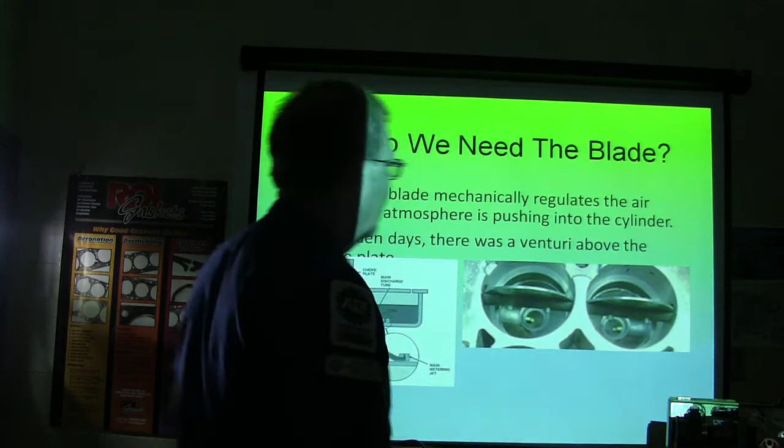The throttle blade mechanically regulates the air volume the atmosphere is pushing into the cylinder. In the old days, there was a venturi above the throttle plate. The venturi is right here.

Have you ever seen me take a hose, like you put a hose in a bucket and stick that hose out here and blow air past it, and it starts misting that water out? That's the venturi effect. That's what that is, and that's what this does.

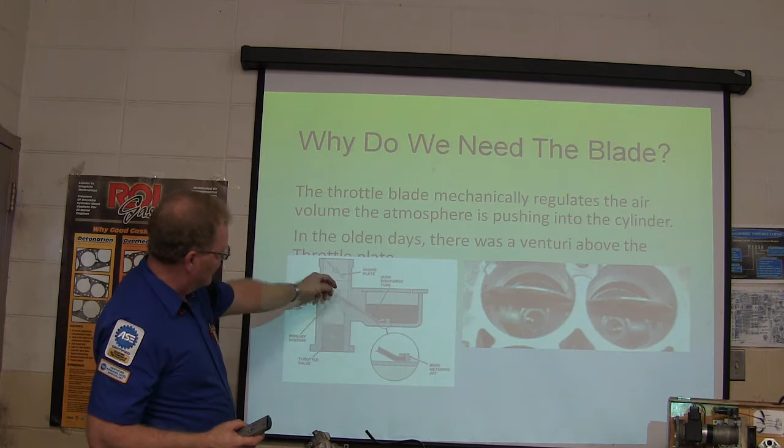Stop whistling. All right, so right here you've got this jet, and it's drawing this fuel up here, and it's turning it, atomizing it, and putting it down here.

Now, in those old days, whenever this was cold, you'd have your choke plate that would close so that you would have more fuel there. But you would also have a lot of this fuel that is turning into mist that was trying to condense against here, and it would cause problems.

So instead of having that happen, since they wanted it to stay mist as long as it would, you can put a screen under there if you want to and all that.

They basically wanted to heat this up. Ford Escorts had a grid under them, some of them, that would get really hot. You got your early fuel evaporation system on your GM.

On some of the old 390s, like on some of the trucks you've seen, it would basically have heater hoses going through a thing underneath the carburetor that was supposed to get it really hot really fast.

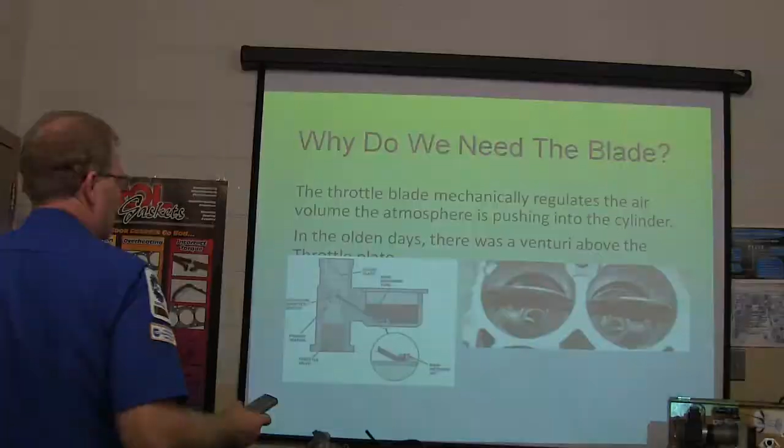But anyway, there's your throttle plate looking down through there. Now, the choke plate richens the mixture by cutting off some of the air. A rich mixture is required for cold engine starts and to keep a cold engine running. Do we need this on a fuel injected engine?

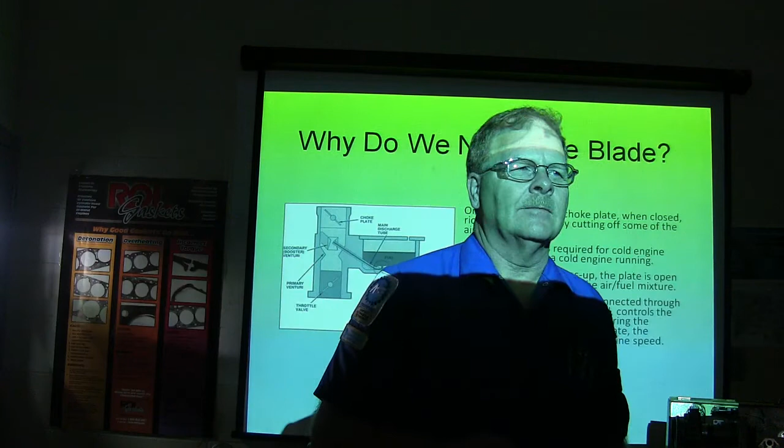Not a choke, but do we need a richer mixture when it's cold? Yeah, we do. The engine underneath all that fuel injection still needs the same thing it always needed. So when the engine warms up, the plate's open and no longer influences the air-fuel mixture. Typically this choke plate is going to be completely open within about 90 seconds on one that's got a heated choke.

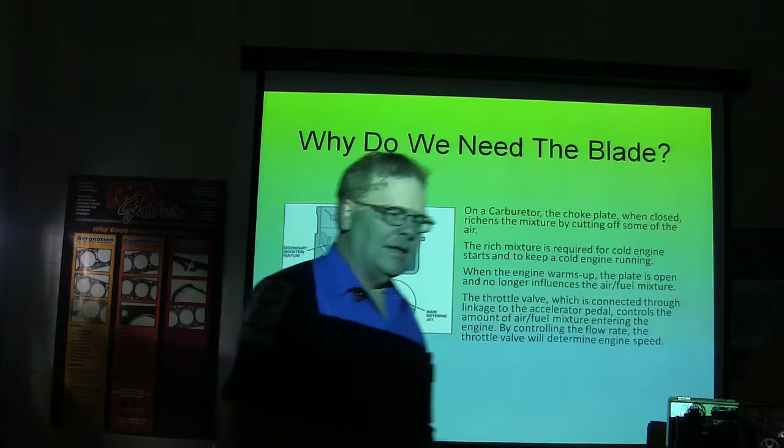When the throttle valve is connected to the linkage accelerator pedal, it controls the amount of air and fuel. There's an accelerator pump in here that's not pictured. It's basically a little diaphragm, or it'll have a little cup that looks like a wheel cylinder. When you mash it, it squirts fuel out on those venturis to overcome the gravity of fuel having to come up out of the venturis. It's not going to happen instantaneously, so you've got to have an accelerator pump. When there's no air flowing through except what you're spinning, the accelerator pump wets the manifold so that it can start up.

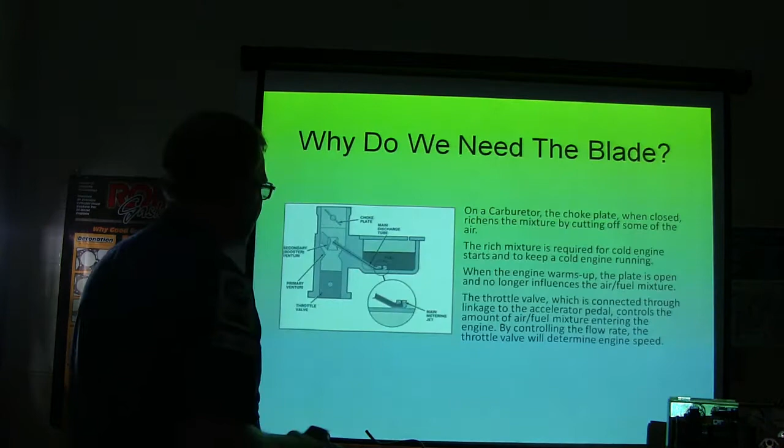The additional fuel delivered when the throttle's open unites with the oxygen and it burns. Now what is it that expands in there? What is it that expands?

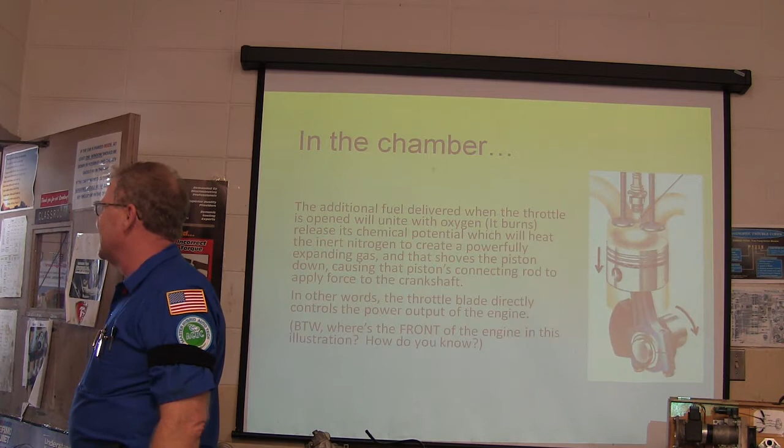Hey, you dissed me, man, how come you didn't show me? Well, I had a few things go on this morning, and I ended up having to ride with my buddy. But I've been meaning to get over here. I've been busting ass ever since I had a test at 8 o'clock this morning. I got some stuff I got to pay and all this jibber jabber. But I'm probably gonna be there Monday. I'll be looking for you Monday morning, don't be late. No problem.

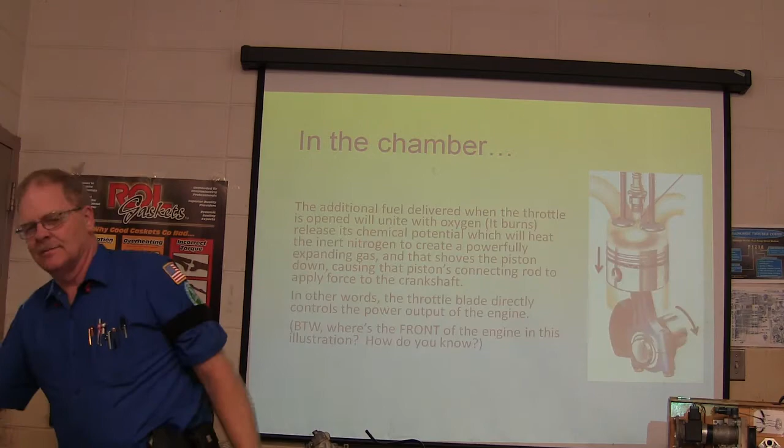So what is it that expands and pushes the piston down? Combustion gases. Well, what is it? Think about this. What's in the air that's going in there that's mixing with the gas? And what else? Nitrogen, hydrocarbons, nitrogen. Most of it is nitrogen, isn't it? 78%. So what happens is the oxygen, there's a little bit of oxygen in this hydrocarbon, and the nitrogen expands.

Yeah, the nitrogen expands, and expanding nitrogen is what pushes the piston down. The nitrogen's inert, but it's actually what you'd call the working fluid, it's actually what's doing the work. The explosion happens because of the other gases, but the nitrogen's what's expanding. You don't usually hear that, right? Because most of what's in there is nitrogen. The explosion is probably the initial kick, but then afterwards it pushes the rest. The nitrogen gets really hot, and when it gets really hot, it's pushing the piston on down. But the oxygen is what accelerates the combustion and unites with the carbon.

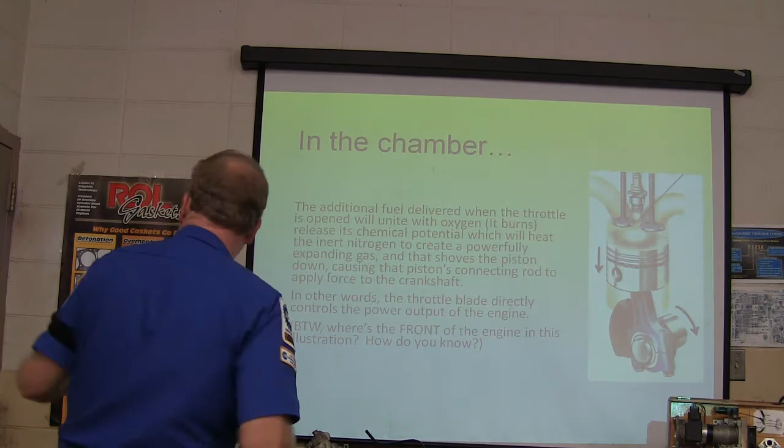The throttle blade directly controls the power output of the engine. So where is the front of the engine in this illustration right here?

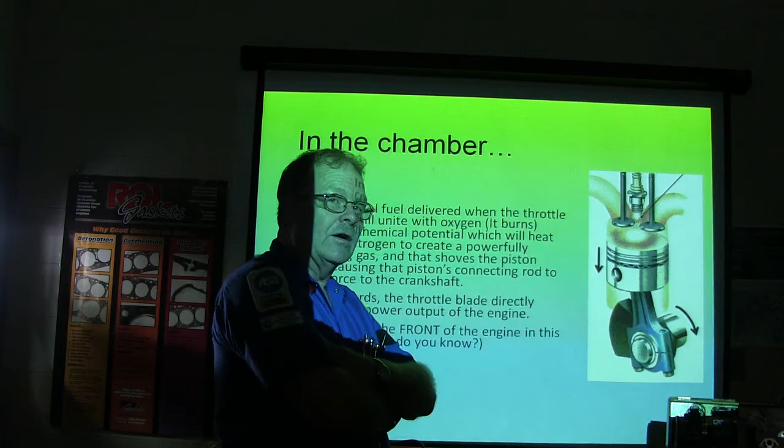Which is the front? Is the front this way or that way? And how do you know? This way. Which way, toward my way? Okay, how do you know? It's turning clockwise. That guy's just really smart, isn't he? Because of the direction it's turning, unless it was a Corvair, he's right. So it's turning the right way there.

As points ignition morphed into electronic ignition, and fuel delivery morphed from venturi delivery into electronic fuel injection, the age-old system of accelerator pedal, linkage, and throttle blade has changed into electronic throttle control. There's some pictures up there like that.

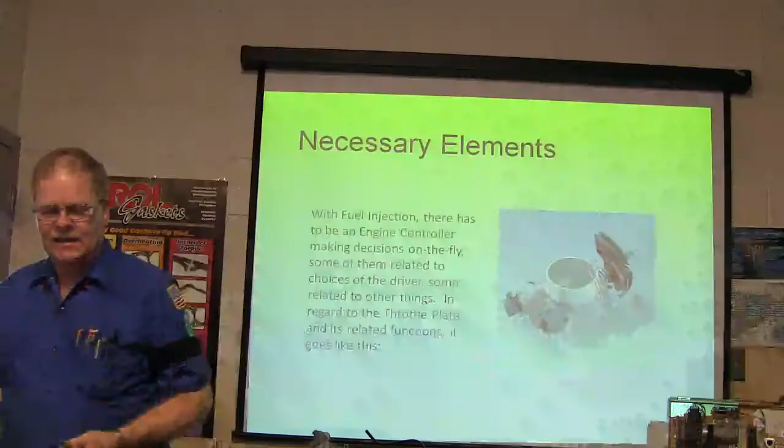With fuel injection or an engine controller, here's something else a lot of times you don't recognize. Have you ever seen, like on the Bronco out there, the throttle cable is hooked to a system of levers? It doesn't just hook directly to the throttle plate. It's actually got levers and stuff and little throttle ball joint looking things. So that whenever you're moving the gas, the butterflies are moving at a particular rate that the geometry causes it to open at the rate they want, instead of just having it directly hooked to it. The engineers came up with that on some of these to make the throttle plate open at an angle that wouldn't cause stumbling or whatever.

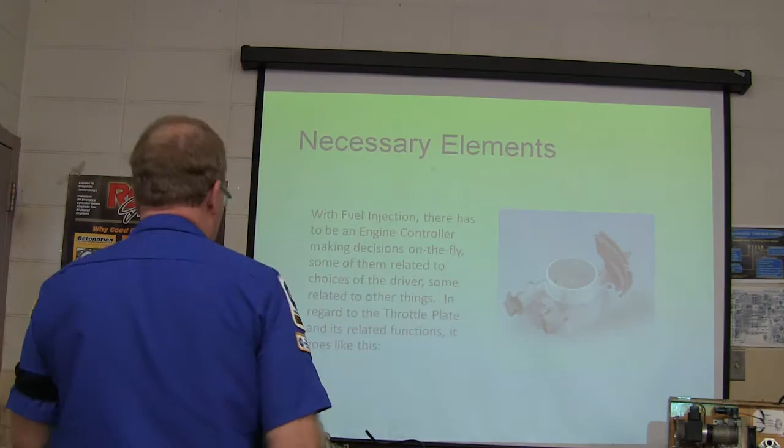But anyway, it has to make a decision on the fly based on choices of the driver, the engine controller's got to be able to tell what you're doing. But then this one here has got a throttle cable, and it goes around that. Okay, somebody tell me what that is.

What's that? Throttle position. And what's that? I'm gonna guess it's your idle air control. That's right, that's a good guess.

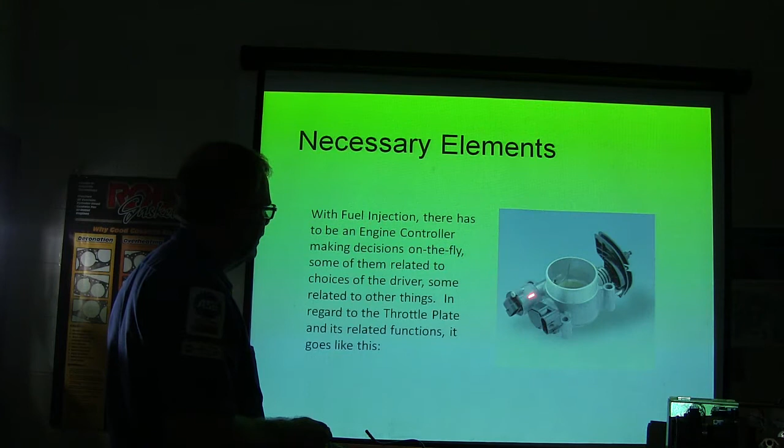When the vehicle's first started, the driver doesn't have to do anything. This is no touch starting. Now on that '69 Ford, the 3-on-the-tree one we're working on, when you get in there to start it up, there's 2 things you've got to do before you turn the key. You have to hit the gas, and you're going to have to pull the choke, because it came with a choke knob, right?

The idle air control opens wide, the injectors double pulse to wet the manifold, like the old accelerator pump did. The engine still needs what it always needed.

Now every now and then I like to tell this little story about this '97 Altima that went to shops all over the place, and they were all trying to figure out why it started hard. Remember that story? It just started hard, but once it started in the morning, first thing, you could drive it all day, and usually if you started it regularly, you didn't have any trouble.

And so somebody had put an engine controller on it, and that didn't fix it, and they took it back off. Anyway, they were trying to charge the lady a bunch of money for stuff that didn't fix the car. So she just brought it over here, because she was enrolled here, and she figured she'd give us a shot at it.

I just thought about it for a couple of days, and I was thinking, it sounds to me like one that you're trying to start without hitting the accelerator pump. I got checking the injectors, instead of double pulsing when you would spin it over, they were basically just firing sequentially like they would if the engine was idling, and that wasn't enough gas to start a cold engine, right?

So I went to the engine controller, and I think it was pin 20 that actually receives the signal through the ignition switch when you turn it to start, wasn't getting hot. So I looked at the schematic and I said, well, pin 20 carries the start signal to the engine controller through the fuse box, and there's a fuse over there. Let me see if that fuse is blown. And somebody who was driving the car had pulled that fuse and put it somewhere else.

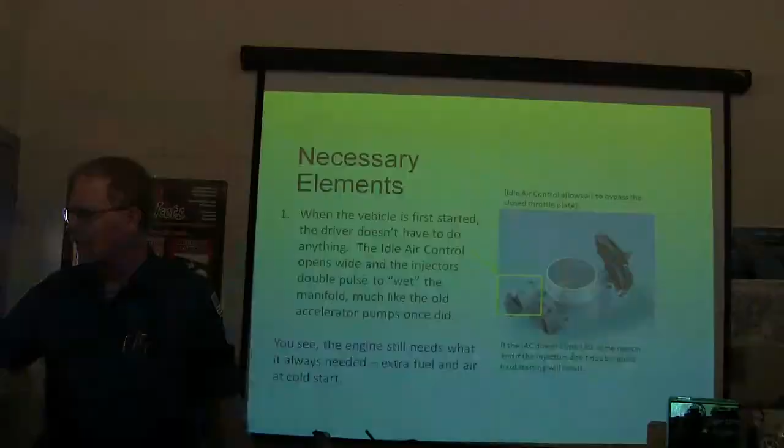And so when I put that fuse back in there, it went—that's all that was wrong with it. Somebody had put a fuse in the wrong place. But it had to do with understanding the fact that the injectors have to double pulse to do what the accelerator pump used to do. See, that's not all that complicated.

If the IAC doesn't open though, if it's stuck closed or if it's bad like on one of these, you're going to have a hard starting vehicle unless you put your foot on the gas and just hold it a little bit, let a little bit of air in there. But there are so many people out there nowadays that are accustomed to just spinning it over and starting it up. A lot of the times they don't know.

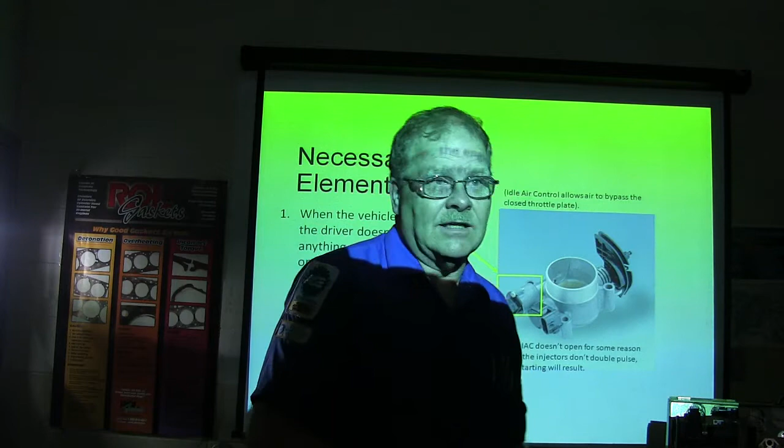I knew one woman whose vehicle stalled because of some throttle body issue, and she called me to come see about it. I looked, and she says the oil light came on. And I said, the oil light came on, really? She says, yeah, it stalled and then the oil light came on. I said, well, see if it'll start up.

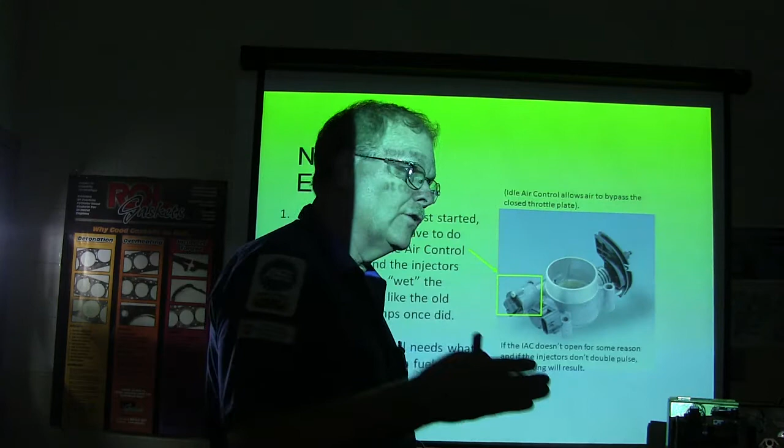So she started it up. And I said, well, that's all you needed to do. And she said, well, she's always had nearly new cars, and that one stalled. When she saw the oil light, she thought it was a kiss of death. But if it stalls first and then the oil light comes on, that's not really a problem. It just means the oil pressure went away because the engine stalled.

At key on, the engine controller gathers data on barometric pressure—it'll get that from the map sensor or the mass airflow typically—coolant and air temperature, and closed throttle position, which is basically going to be stored for the entire engine cycle until key off. Now when it's at part throttle, it's going to be holding the idle air control up with a dash pot function, and when you let off it comes down slowly so the engine doesn't stall.

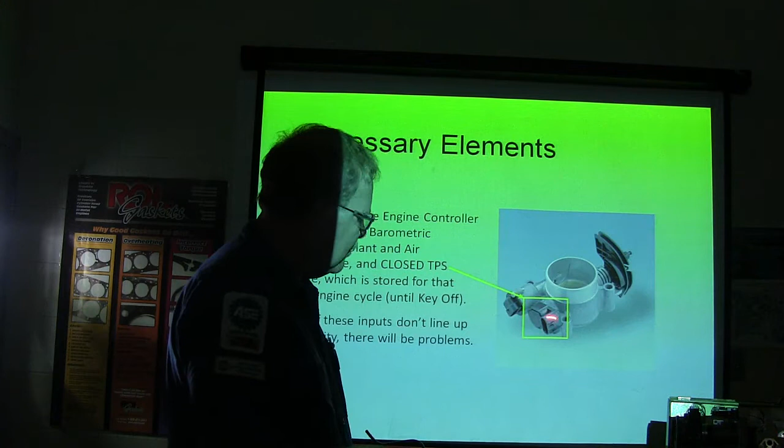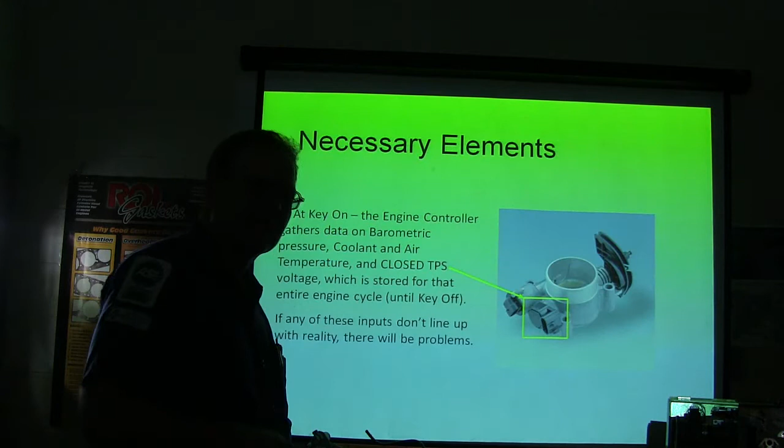If for some reason something's wrong, like you've got wire connectors that aren't right, or a throttle position sensor that doesn't reflect that baseline it got when it first started, you're going to see one that idles too fast. Well, I'll tell you this, on my truck—and it's not just mine, it's about all of them that year—they idle up very, very high when you first crank them up. It's cold. Yeah.

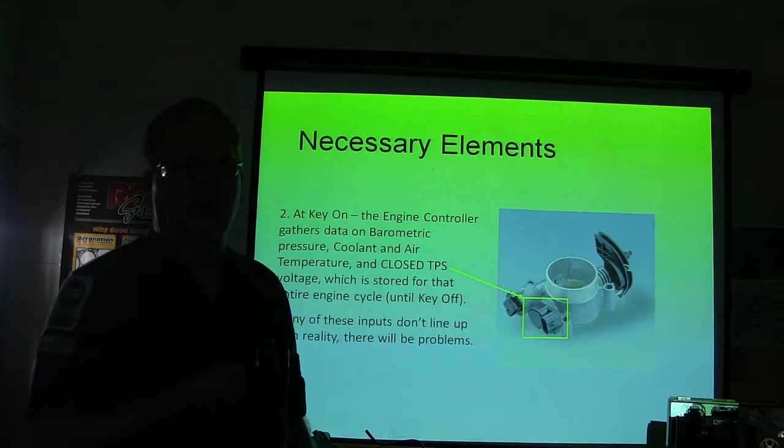They idle up higher than the normal vehicle. Some people just don't like that and think it's the most horrible thing in the world. Now my truck's got a 4.3, or that smaller 4.2 motor, and it doesn't do that, but it's got electronic throttle body too. Yours is a different motor, so you never know unless you can compare to a brand new truck to tell if something's out of kilter.

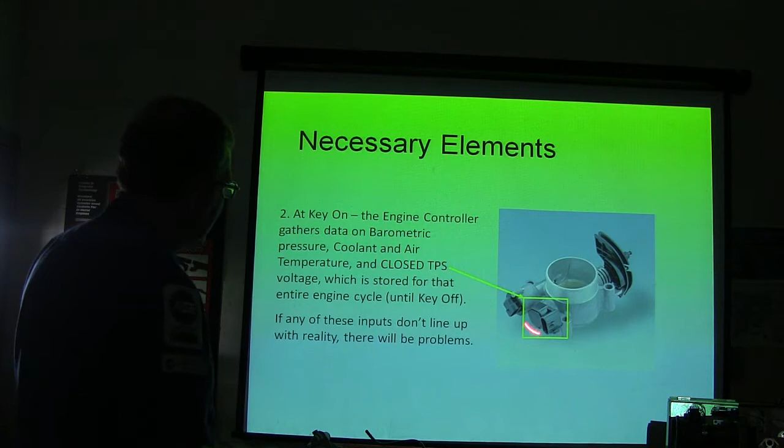If any of these inputs don't line up with reality - barometric pressure, coolant, air temperature - your closed TPS voltage is pretty important as far as throttle body operation. If any of these inputs don't line up with reality, there's going to be problems.

Now, here's what the GM and the Chrysler and a lot of the others have got: a stepper motor.

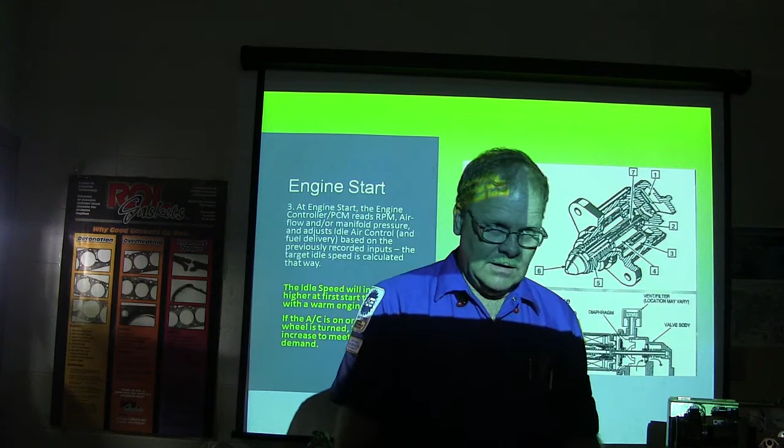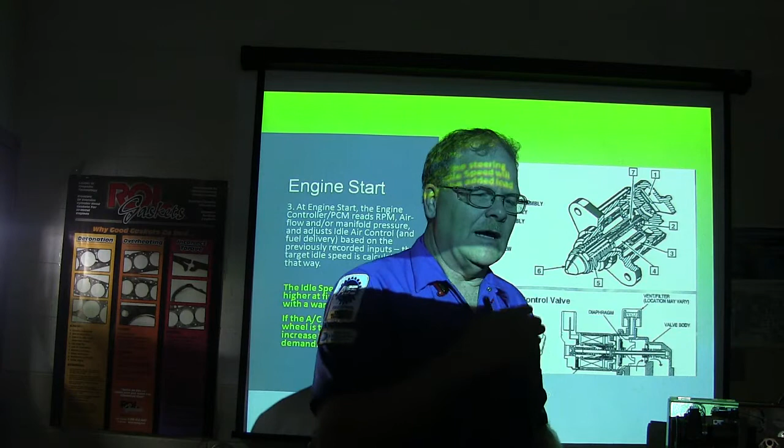This thing right here is going to turn in little segments, little steps, and it's got a nut hooked to it. Imagine a nut that turns, and there's a threaded shaft in there that moves out and in. Each time you've got one power and let's say 3 grounds - there's variations of how this works - it dithers those grounds to it, and it turns that stepper motor in steps.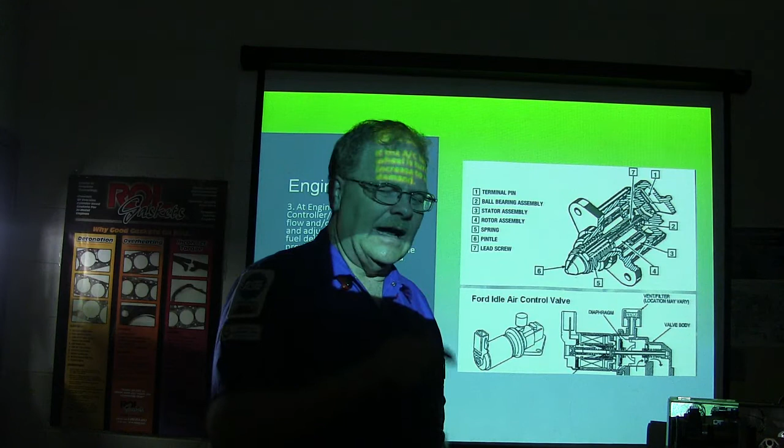Your Ford idle air control is basically - and you can go into the Ford ones - you can dial up the amperage going to this variable, the variable force solenoids that do your transmission pressure work, real similar to that. The more current you deliver to it, the more it moves.

Now, the idle speed will initially be higher at first start than it is with a warm engine. How do they do that on the carburetor? You remember? What do they call the part that does it? It looks like a little saw teeth.

Fast idle cam, what they call that. And when the choke is shut, when the choke first closes, there's a little vacuum brake that opens at about 1/8 of an inch and then it comes back. But while it's partially closed, it's going to be idling faster too.

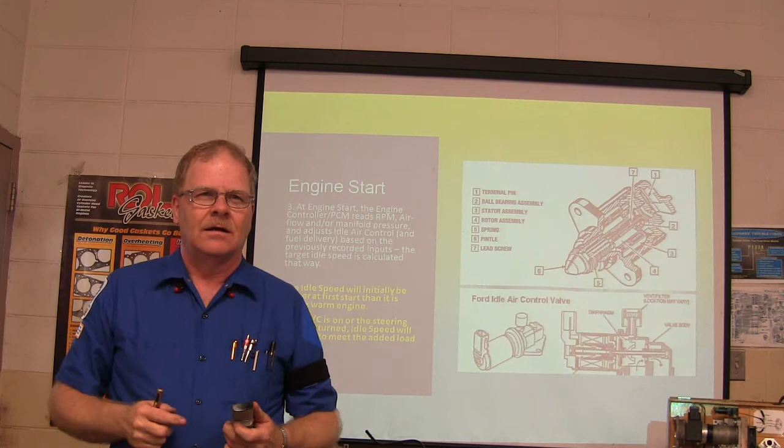You talking about the choke pull-off? Now, the choke pull-off is what opens it back up, but there's a little saw-toothed fast idle cam that's got several different steps on it. Is it kind of just like a lever looking thing? Sort of, but I can show it to you on this motor out here - that's a fast idle cam, and that's one of those things.

And the idle stop screw rests against it. But it comes back and it's not in play whenever the choke is fully opened.

When the throttle starts to open, the PCM monitors the amount and speed of throttle opening. It doesn't just monitor how much it's open, it monitors how fast you opened it. It needs to know that, so it'll know exactly what to do with fuel delivery, ignition timing, and other things it's going to change. If you slap the pedal to the floor, it's looking at the rate of opening. All of these things do that - some even have a PID for it on the scan tool, the throttle opening rate.

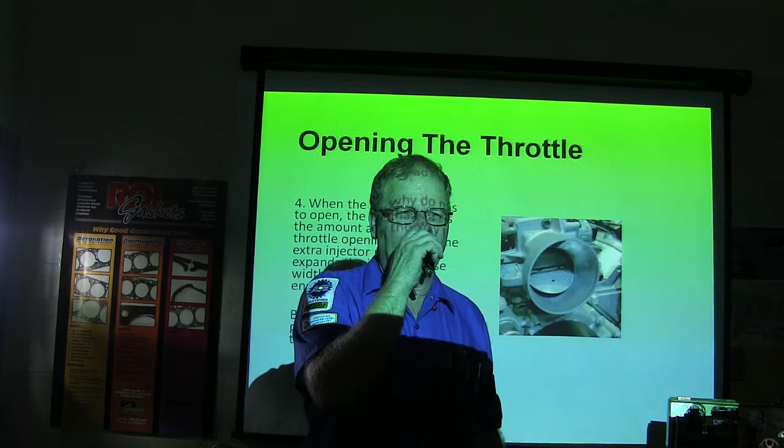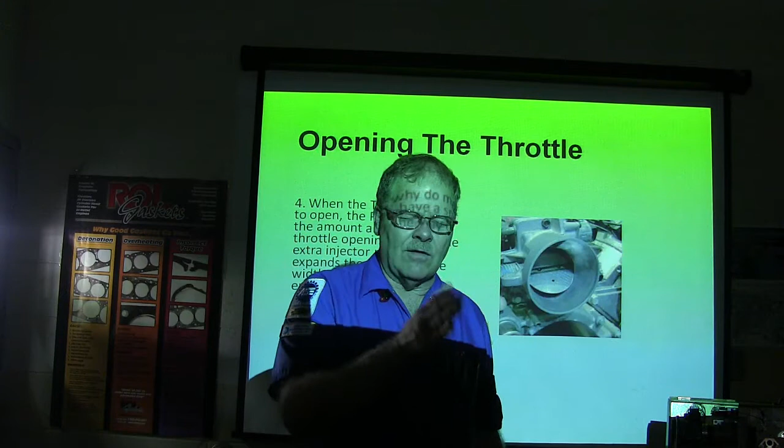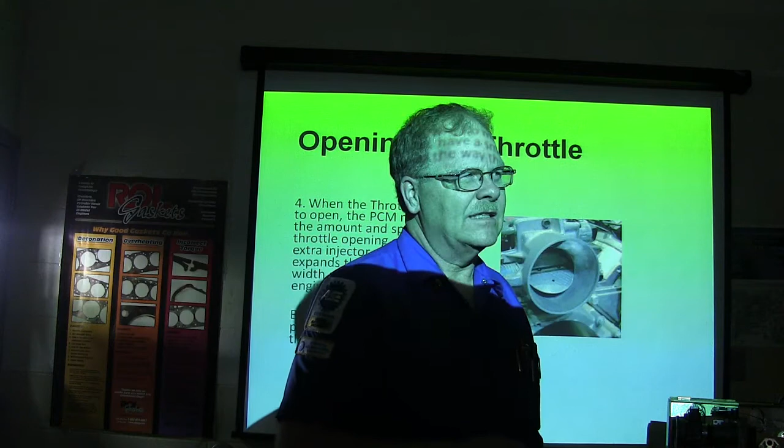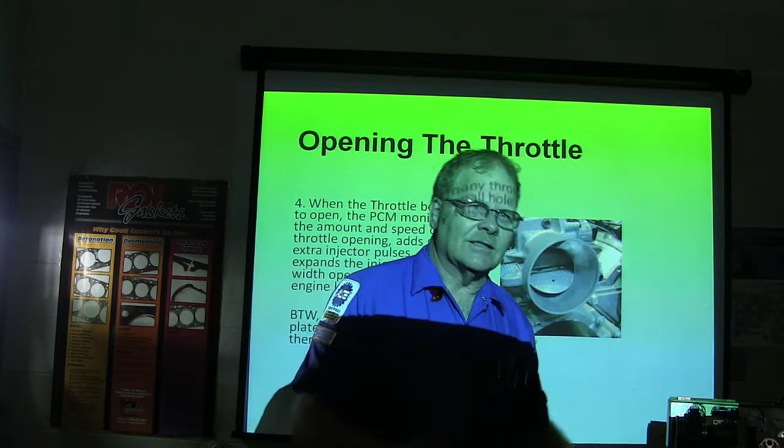Because what are you doing? There's momentum needing to be built, right? So you're going to have power for that. Why do so many throttle plates have a small hole in them the way this one does?

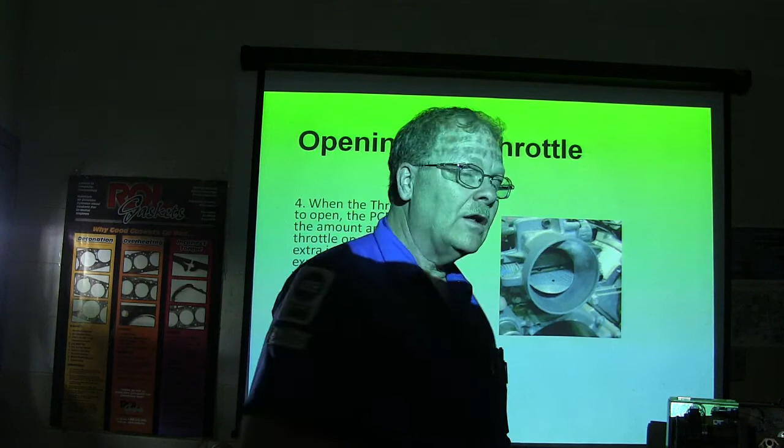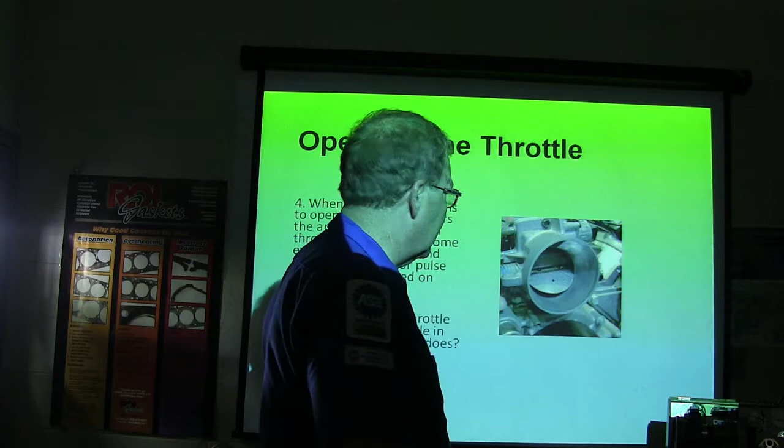Adaptive learning kicks in though. As the throttle body clogs up, adaptive learning kicks in, and you wind up with idle air control numbers that are higher. When you change out the battery on some of them, like on a Dodge, it may forget all that. Then when you crank it up after changing the battery, it may crank and go dead, crank and go dead.

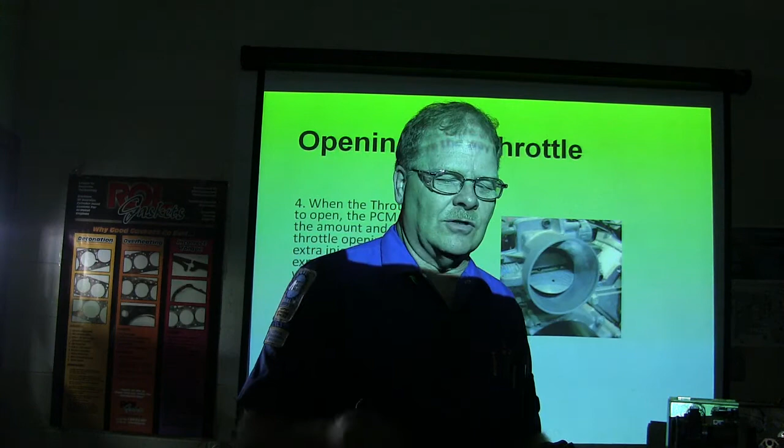What you need to do when you're changing the battery out on a Dodge is clean that throttle body. And remember, if you're working on an electronic throttle body, don't open it with your finger, because on some vehicles that'll cause you to have another throttle body. Make sure you have somebody open it with their foot on the pedal, with the engine not running, so the throttle plate opens, because even when the engine's not running, when you operate the pedal, it'll move the throttle plate.

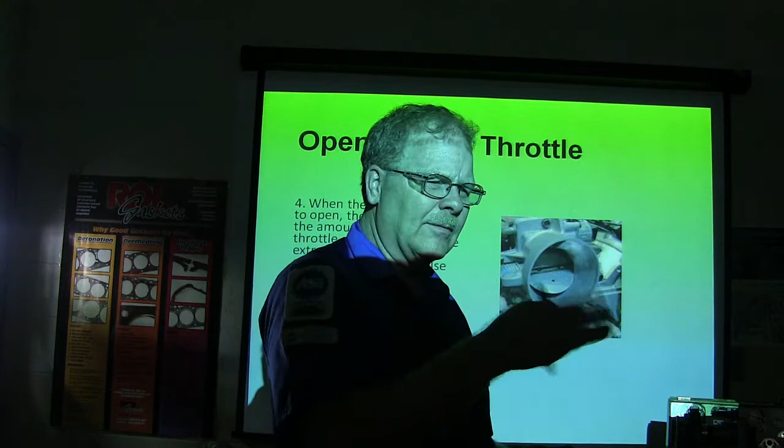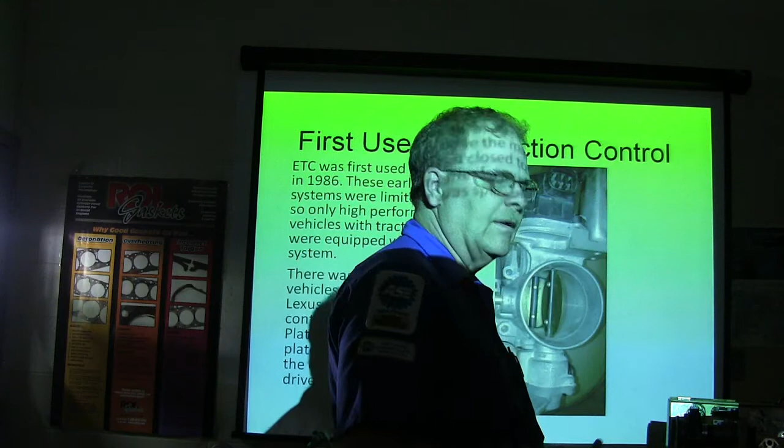Even if it's unplugged, if anything's unplugged it's not going to happen, but obviously if your battery's off it's not going to happen either. What I'm saying is, you can't open it with your finger even if it's unplugged. Don't open it with your finger ever. Think of what's at stake here.

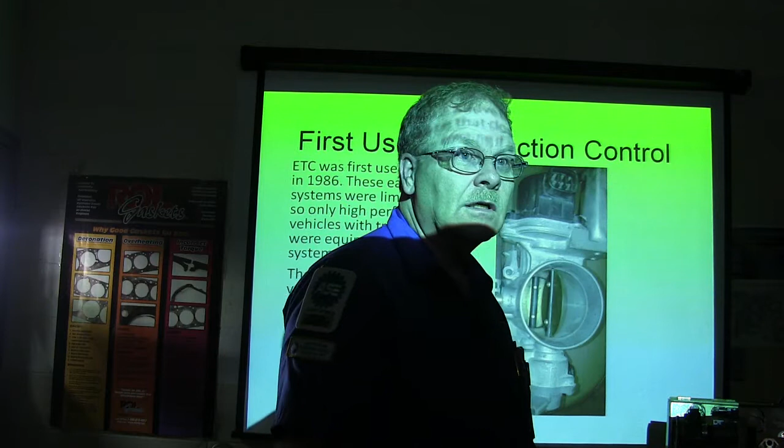Let's say you get by with that nine times, but the tenth time, maybe you're working on a Nissan and you've been working on Toyotas and other vehicles. You open it on a Nissan, and all of a sudden it doesn't work anymore. It's on you. They say, well, what happened? Well, I opened it with my finger. Well, the other nine times it didn't cause a problem. It's like Russian roulette, click, click, you know what I'm saying? We don't want to go there. So make sure somebody else operates the pedal. It's not a good idea to even try it yourself. Some people may get away with it and not have a problem, but I'm not going to go there.

ETC was first used on vehicles in 1986. Now this right here is a throttle plate that's above the regular throttle plate. And if somebody got too rambunctious, I saw this on Lincolns first, somebody got too rambunctious digging out and spinning their wheels too much, the engine controller would shut this throttle plate to throttle it down so that they couldn't drive so dadgum fast.

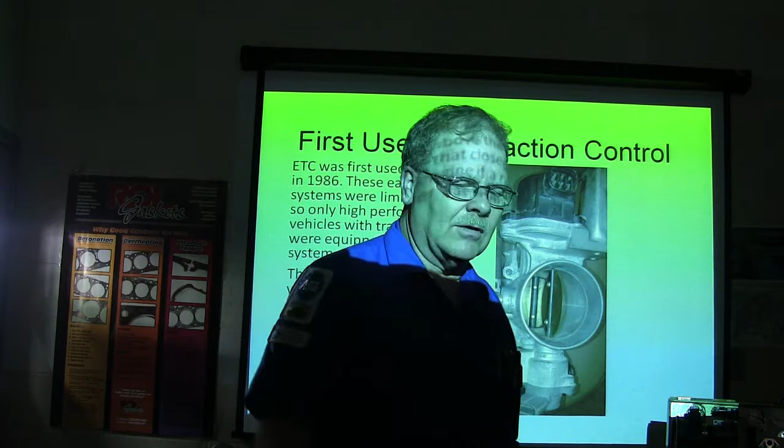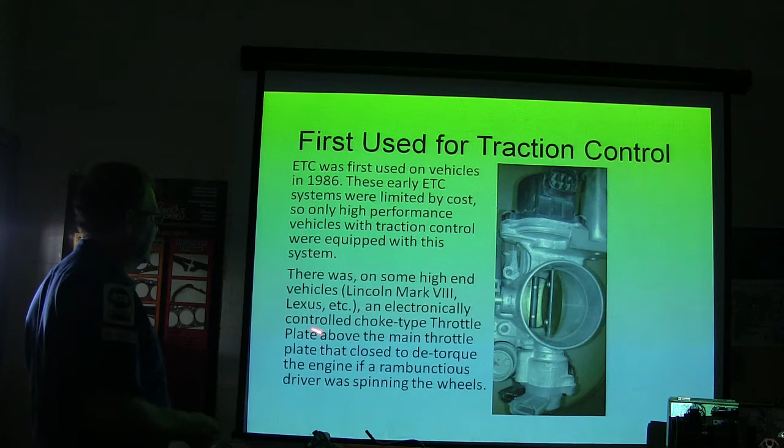Now, less hardware is needed when you've got the throttle body, but there's more software. That eliminates the need for hardware needed for idle speed control and cruise control. You don't need an IAC motor, and you don't need a cruise control servo.

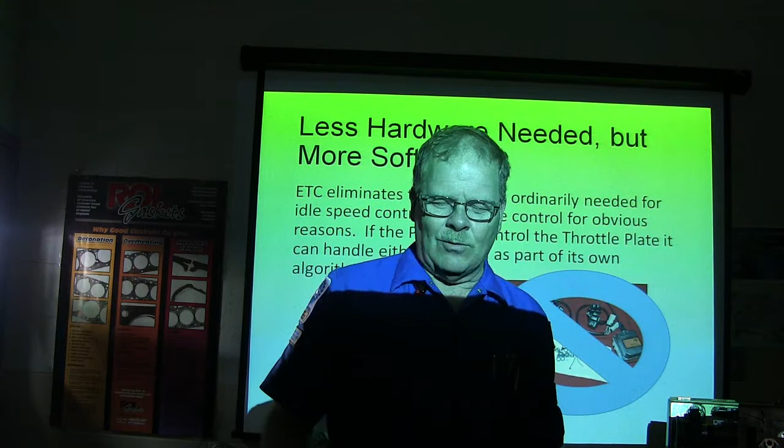When I bought my '07 F-150, it didn't have cruise on it. I bolted the buttons on there and plugged them into a place where it already had the wiring. I went in there with IDS and told it I had cruise - you've got to know how to do it. When I told it I had cruise, now when I set my cruise, the little green light comes on the dash. I didn't have to put anything on it except a couple of buttons, and it was $52 for the buttons. You don't need anything to open the throttle body for you because the engine controller already has all that built in. Power stroke diesels were like that.

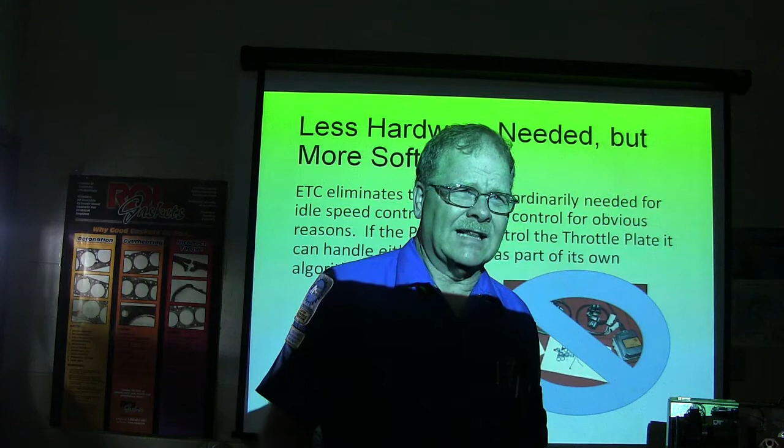In the 7.3, I could put cruise on a Power Stroke diesel by adding a brake pressure switch and putting buttons on the steering wheel, and all the software and everything else from this. If the PCM can control the throttle plate, it can handle either function as part of its own algorithms. So you've got your throttle by wire here.

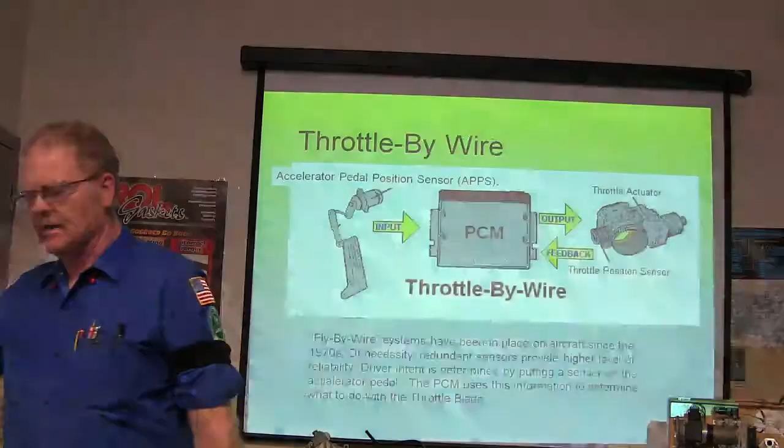Fly-by-wire systems have been in place on aircraft. They have multiple hydraulic lines and multiple electric lines and multiple computers and multiple everything because they're in a situation where if some of that fails, people are going to die. So basically they have multiple everything so they've got backups. Even with military jets taking fire and bullets ripping their hydraulic lines, if they've got three going to the same line, they're not going to lose hydraulic on all three. It's three separate discrete systems.

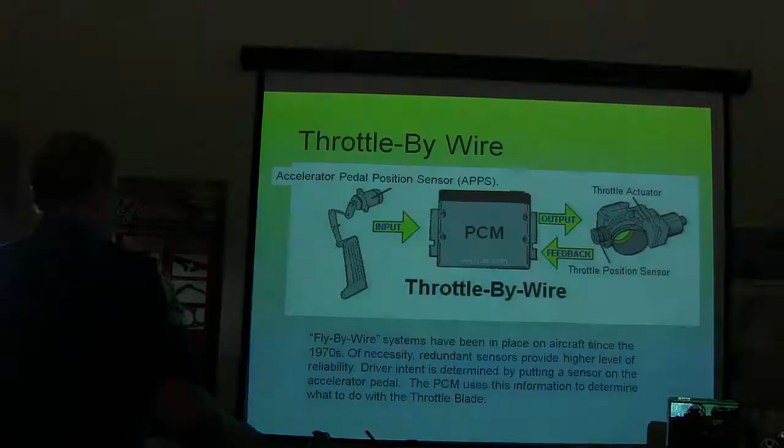Well, on this one here, redundant sensors provide a higher level of reliability. Driver intent is determined by putting a sensor on the accelerator pedal. The PCM uses that information to determine what to do with the throttle plate. So you've got feedback from the throttle position sensor and output to the actuator, input from here.

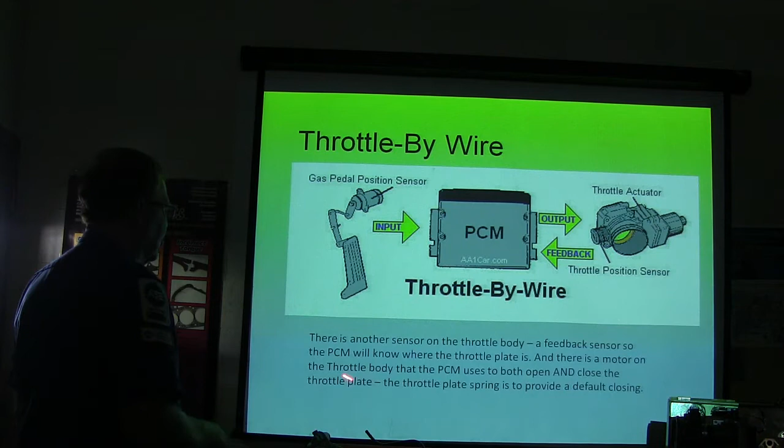So input, feedback, and output, that's what you've got there. There's another sensor on the throttle body, which I was talking about, and there's a motor on the throttle body. Now some of the early 6-liter engines, because they had EGR on them, and it's really difficult on a turbocharged engine to put EGR in there if you don't do it right, they had a throttle plate that would close up to create low pressure so EGR would go in. Then they did away with that. They put a scoop on there in '05 and did away with that. That was a different thing.

All right, so anyway, let's keep going here.

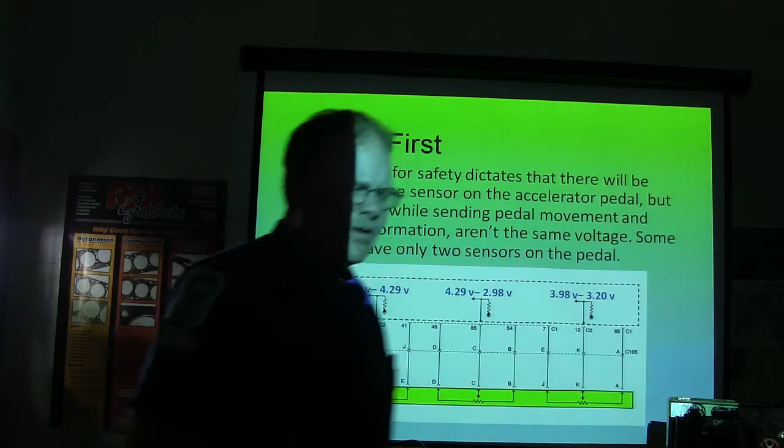Redundancy for safety dictates there will be more than one sensor on the accelerator pedal, but the sensors that send pedal movement position information aren't the same voltage. For example, this right here is the diagram of the sensor on a Duramax, on some of your early Duramax engines, and they're basically drive-by-wire too because they use the diesel part of it to give you the change of fuel and all.

They don't have a throttle plate, but they've got a redundant sensor. And on the original old 7.3 Power Stroke, you basically had a potentiometer and an idle validation switch. And if either one of those failed, the engine wouldn't do anything except idle, and you'd have to replace the accelerator pedal assembly, because it came with that. Some of them have only two sensors on the pedal.

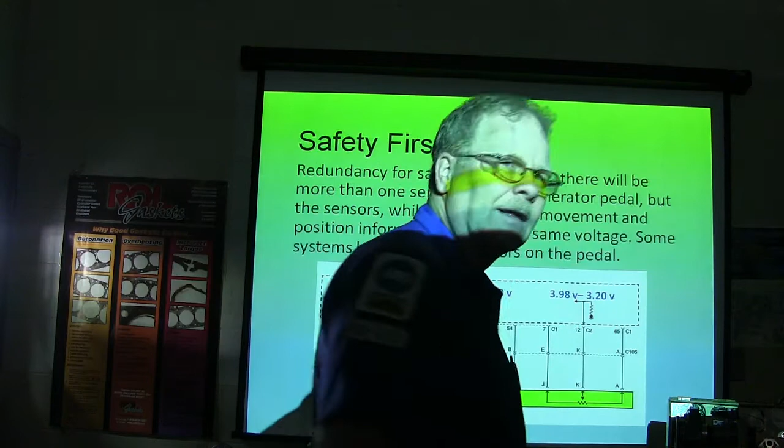You notice this goes from 0.75 to 4.29. That goes from 4.29 to 2.98. That goes from 3.98 to 3.2. I mean, these are just all over the place, you know what I mean? This is three different potentiometers right here that you're looking at. See that? Yeah, all of them move together, but the voltages are just all over the place.

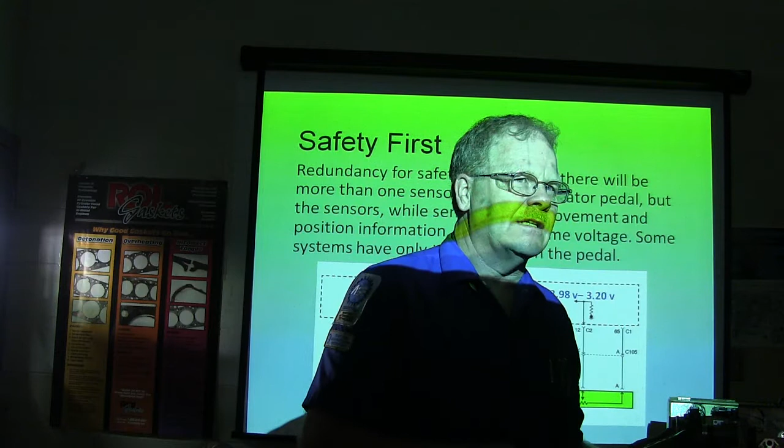But the engine controller knows what to expect. If this one right here is not showing movement, but these two are, it's basically going to reduce the power. And if two of them fail, you won't be able to do anything but idle, because it needs to know what you're doing with that accelerator pedal. And they made it so that if it fails, it errs on the side of caution and takes away your ability to apply the throttle.

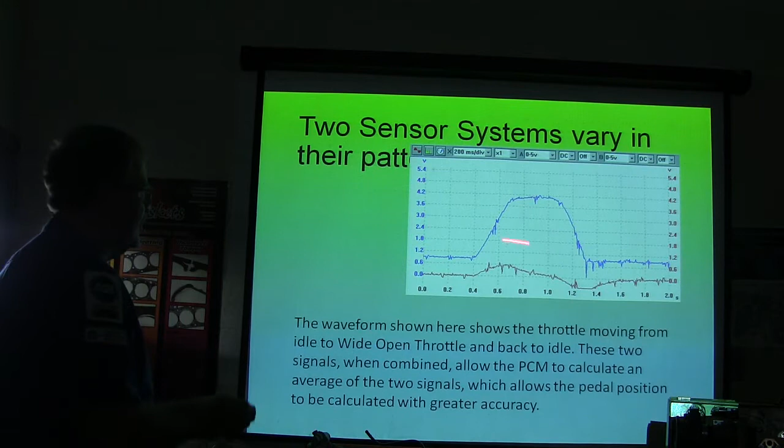Some of them will hold the speed up a little higher so you can drive a little faster than a snail, maybe. But the two sensor systems vary in their patterns. This is one waveform that you're going to see. This one here has got a waveform that's a lot lower than the other, and it basically averages them out. When you combine it, it calculates an average of the two signals on this two-sensor system, and a lot of them have just got two sensors instead of three.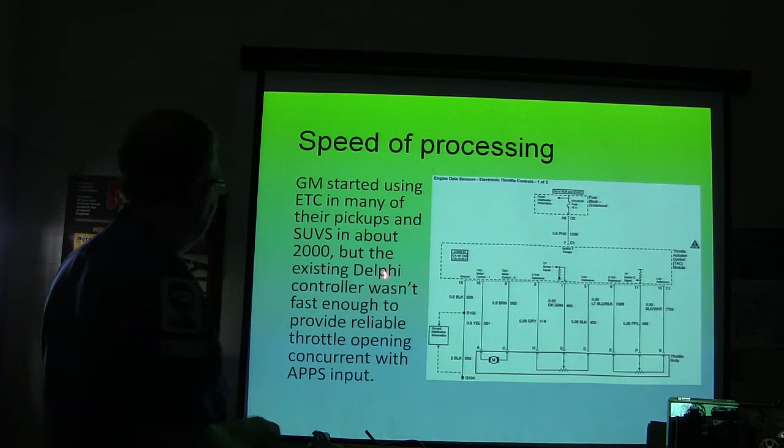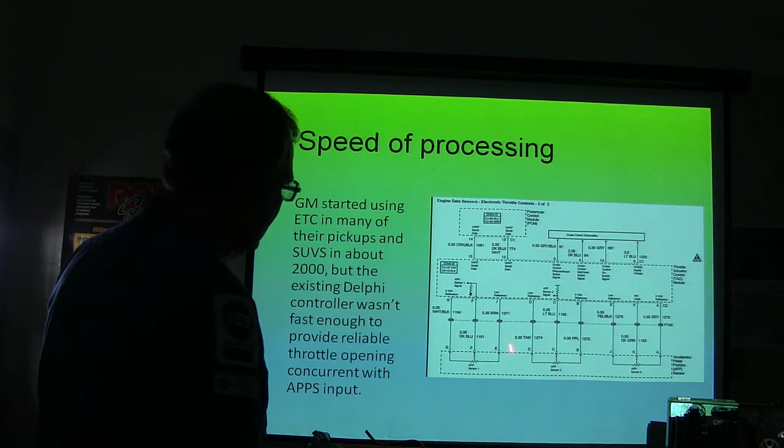GM started using electronic throttle control on a lot of their pickups and SUVs around 2000, but the existing Delphi controller apparently wasn't fast enough, so they put a little box over here on the side that would operate the throttle control, and it interfaced with the PCM. The throttle control actuator module was responsible for receiving accelerator pedal input, but the engine control module was basically interfacing with it too on that UART serial data line. Since this controller wasn't fast enough to do what this was able to do, and this thing here had one job, your cruise control was actually talking to that throttle actuator module too.

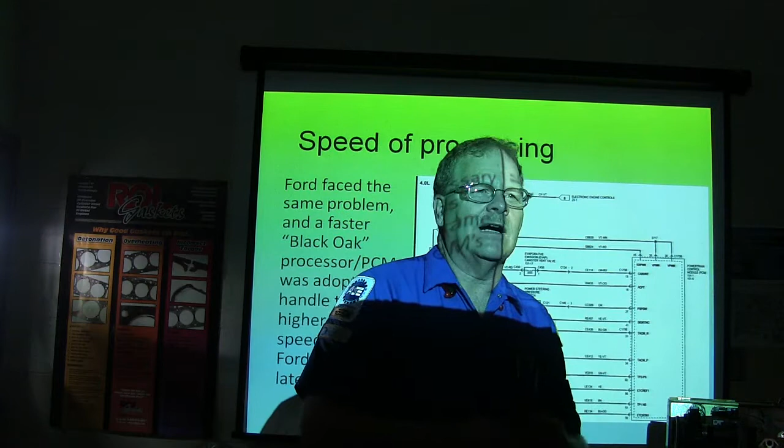Well, Ford faced the same problem, but waited a little while until they had this Black Oak processor. You know the one with the three big connectors going to it? That's your Black Oak processor. That's the one I got. Exactly, and it's because you got electronic throttle control. They had one that was fast enough. This is what it looks like on a Ford area PCM—it's basically able to do it because it communicates a lot faster.

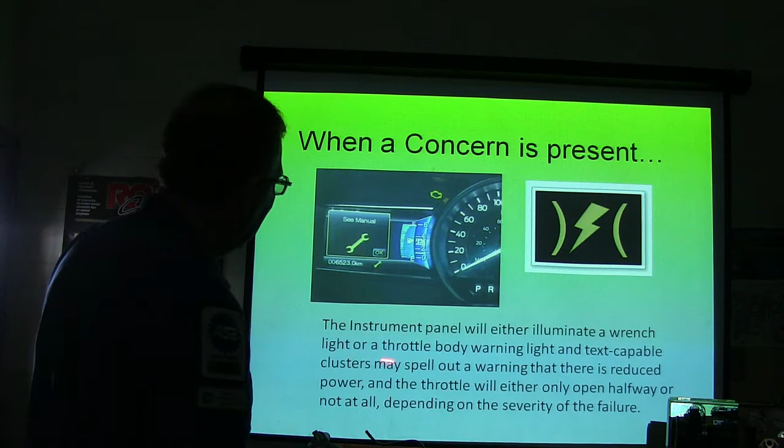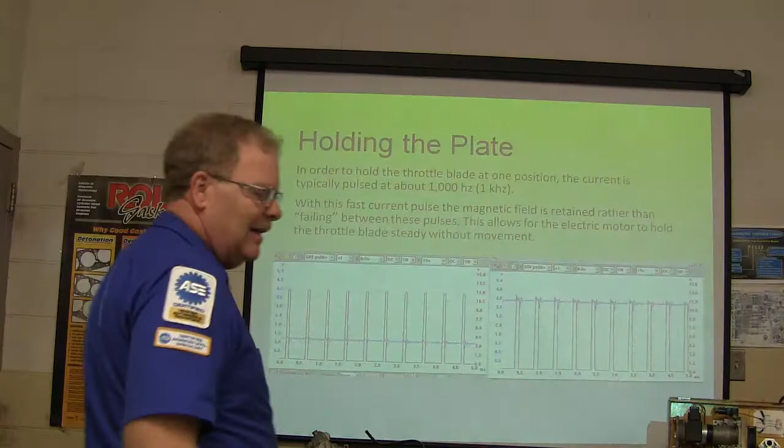When a concern is present, the instrument panel will either illuminate a wrench light or a throttle body warning light, and text-capable clusters might spell out a warning that tells you there's something wrong with the throttle—forced, limited, power, whatever. The throttle sometimes will either open only halfway or not at all. You can't have full throttle if your wrench light's on some of these Fords. And in order to—this is something a lot of people don't know—that engine controller doesn't allow the spring to close that throttle body. It drives it both closed and open, so it can operate it really fast.

And this is what it looks like if you scope it. You notice this is happening so fast that the magnetic field doesn't have time to decay. So basically, the more it drives it, the stronger the magnetic field gets, but it's pulsing really, really fast—like 1,000 times a second, something like that. I need to turn that back off so I can do this.

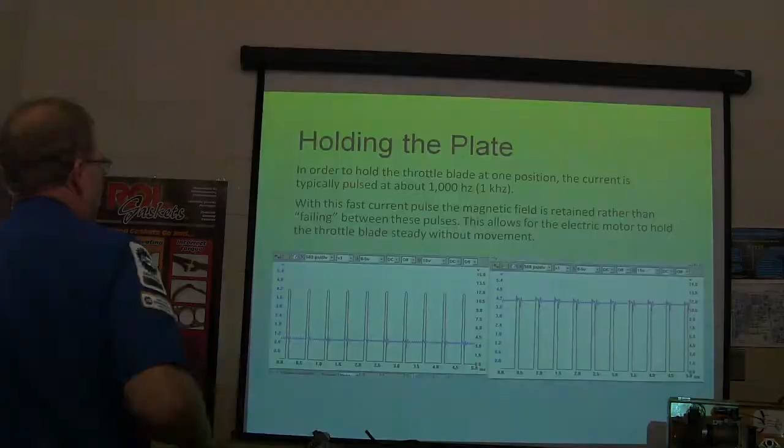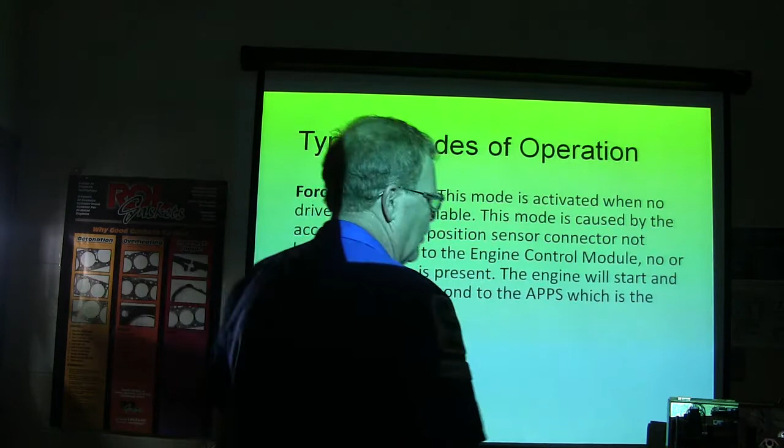In normal mode, it's selected at power up and will remain active till a problem is detected. Once a problem is detected, the appropriate action is taken. Limit performance is activated when driver intent can't accurately be determined or when the output of engine power is impaired—maximum power is lowered, throttle blade control is slowed down, and the warning lamp is activated. Forced idle mode is activated when no driver intent is available—it doesn't even know what you want to do, so it's not going to do anything with the throttle. One of the scary things about electronic throttle control to the engineers was, what if this thing runs away? They didn't want that happening.

This can be caused by the accelerator pedal position sensor not being connected to the engine control module. A short circuit, like a wire that's rubbing against ground that comes from that system, can also cause that to happen. I've seen that before.

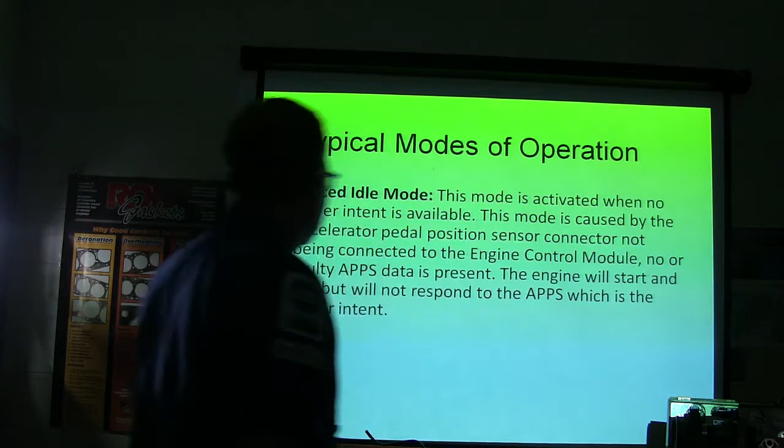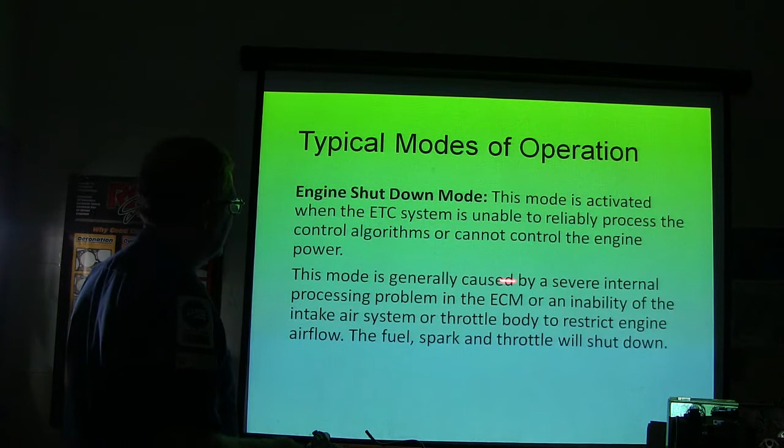Power management mode is activated when the ETC system can't reliably control engine power using the throttle. The throttle is disabled so it can return to the default position, and it's controlled by using fuel and spark only, and that's usually caused by an inability to position the throttle blade. If it can't move the throttle blade, it does what it can using other things. And then, when the ETC system is unable to reliably process control algorithms or can't control engine power, it's generally caused by an internal processing problem in the ECM. If it knows enough to know it's going to just go totally ballistic, it shuts down to save the driver.

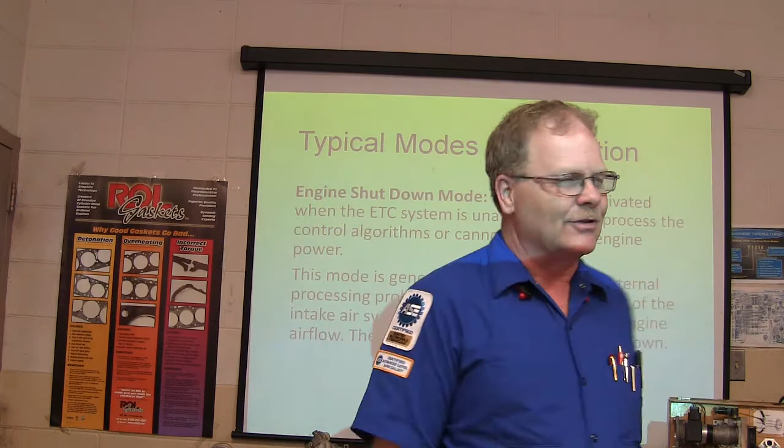Even if the toe adjustment is correct, the vehicle will generally pull toward the side with the most blank camber and the most blank caster—negative camber, positive caster, or positive camber and negative caster. Positive camber and negative caster are supposed to be A.

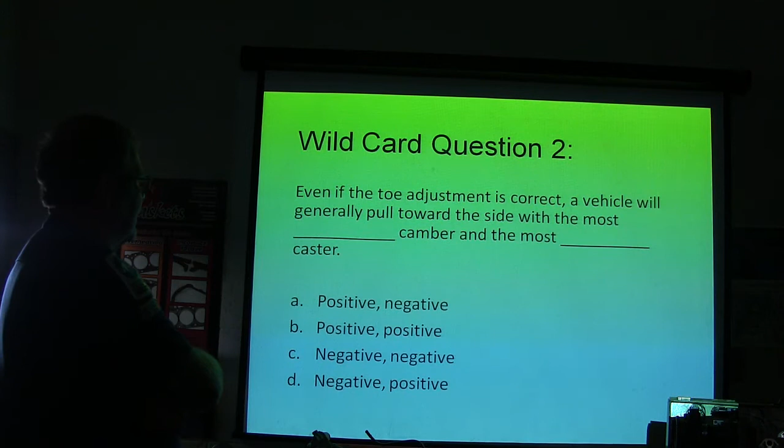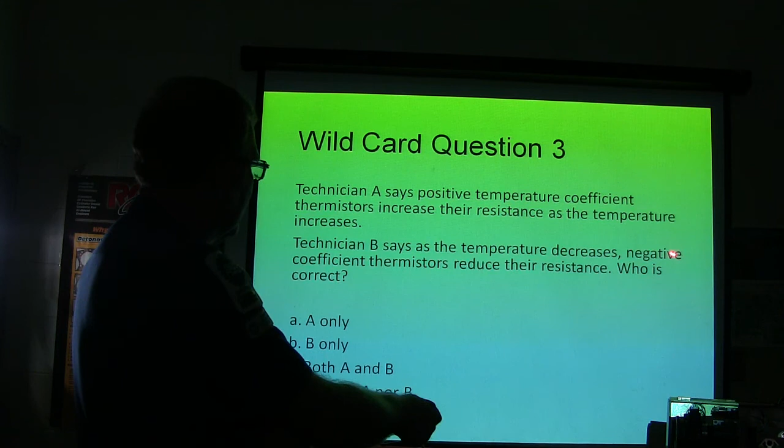All right, hold on just a second. Technician A says positive temperature coefficient thermistors increase their resistance as the temperature increases—is he right? Hold on. Positive means that the hotter it gets, the higher the resistance is—that's what you'd expect. Technician B says as the temperature decreases, negative coefficient thermistors reduce their resistance. Now he's wrong, A's right. Yeah, as the temperature decreases, as it gets colder, the negative ones get more resistant, right? Banjo bolt fittings such as the fluid connection of the brake caliper...